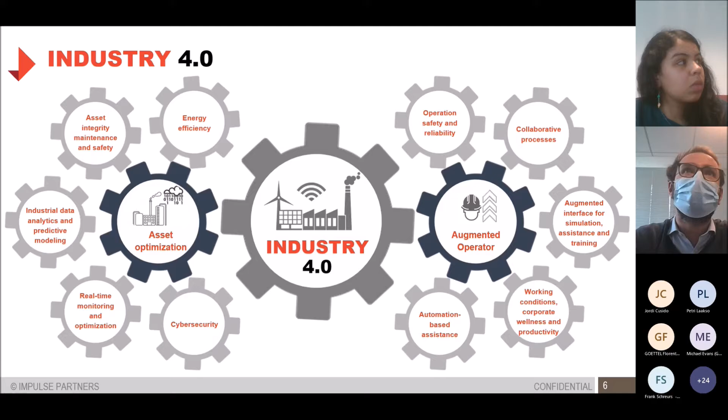Next slide, please. To support this transformation, coming up today we will have the pleasure to hear from Chantal Bottelin from TotalEnergies and the company's initiative regarding low carbon thematics such as the Rainbow Project. Then we will hear use case presentations from 4 entrepreneurs from the UK, Netherlands, Spain, and Finland. We will also hear Jan Borgstädt from Joint Capital, who will present venture activities in Industry 4.0. To close the session, we will have a few minutes at the end dedicated to Q&A. Please do not hesitate to use the chat to type your question. Without further ado, let's start the 13th edition of Impulse Talks dedicated to Industry 4.0.

And Chantal, I leave you the floor to present the Rainbow Project. Thank you, Jérôme. Thank you, good afternoon, everyone. Sorry, I have a huge cold, so maybe it will be difficult to understand what I'm saying. Don't hesitate to interrupt me. So today I'm going to talk to you about the project Rainbow, which is about leveraging digital transformation for decarbonization of our activities and products. Next slide.

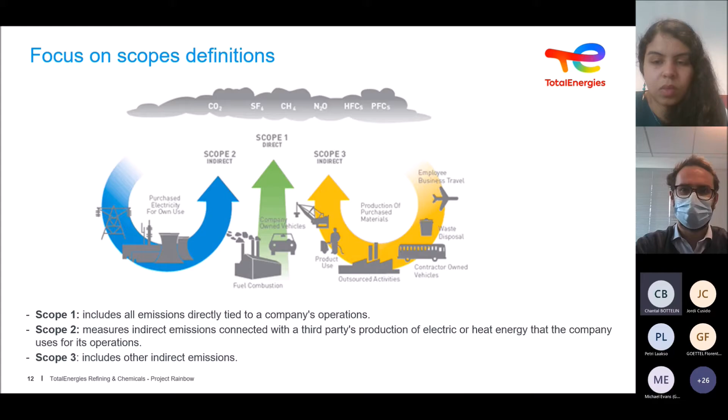So I'll go through the first one, Scope 1 and 2. We have, in general, 280 projects at refining and chemicals related to decarbonization of our activities, Scope 1 and 2. We have carbon capture and storage projects. We have green electricity, and I don't know if you understand what green electricity means, but if you buy some on a private point of view, you probably know what it means for an industry. Energy efficiency, of course, if you consume less energy, you emit less CO2. We electrify our processes, replacing turbines, for example, rotating equipment powered by gas.

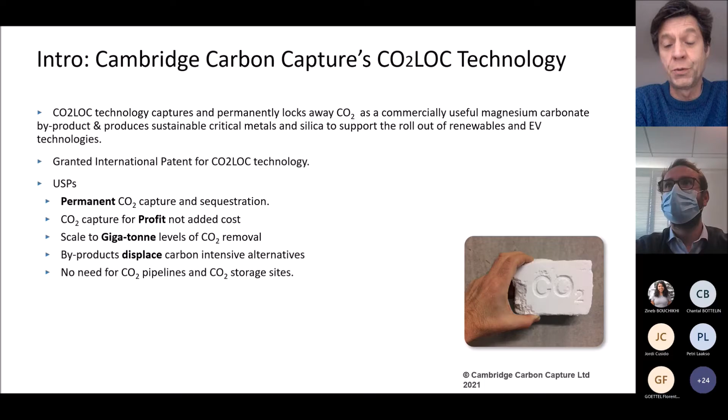Next slide, please. So the opportunity is that in all the IPCC reports that have been published, there is a very large part to play for carbon capture, storage, and utilisation technologies. These are significant quantities of CO2 that are going to need to be captured and stored, and we offer quite a unique proposition. Next slide, please.

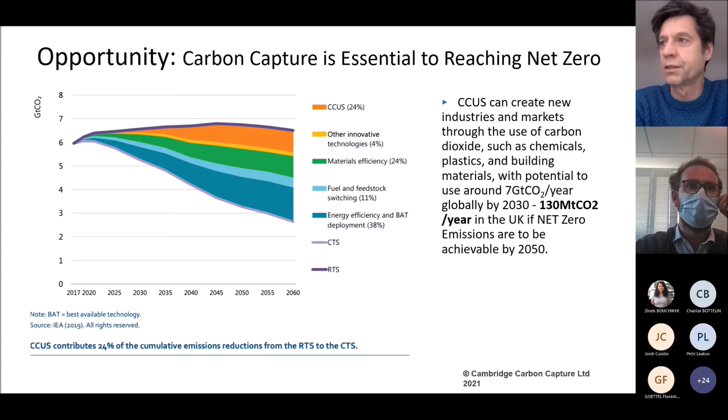So many of the competing technologies to ours involve carbon capture and storage. This is the main industrial solution that's been explored. But this requires very expensive infrastructure. It's very energy intensive to capture CO2, but then also transport it and store it. Then this needs to be monitored over a period of millennia potentially. And there's no commercial benefit from this, so it's all cost.

There are technologies looking to utilise the CO2 that's captured, and some of these do produce other products, and similar to us, these do offset the cost of capture, but not to the extent that ours does. It basically just about covers the cost in the best case. Some of these products are restricted by the size of the markets for the byproducts, particularly in the chemical sector. And some options involving making fuels cannot really be considered a carbon capture technology because the CO2 is re-released through the use of the fuel.

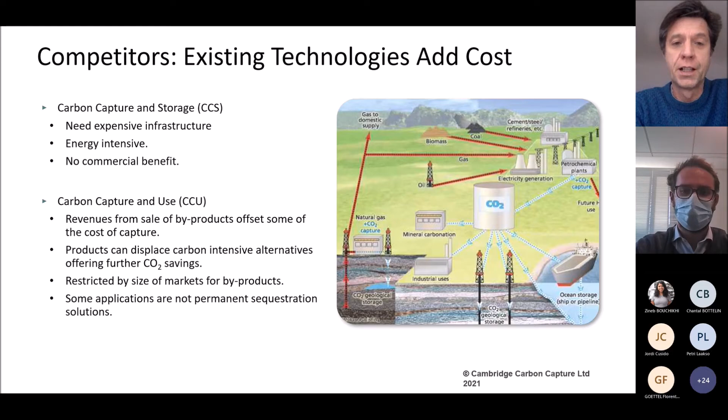Next slide, please. So this is our technology.

It's a two-stage process. I always start with stage 2 because this is where we actually capture the CO2. We can also capture NOx, SOx and H2S as well, incidentally. We do this using a magnesium hydroxide feedstock and standard scrubbing technologies you're probably all familiar with, involving scrubbing using slurries, etc. The CO2 is captured as magnesium carbonate, which can then be dried and used as a construction material, or as base chemicals in various other products.

But for stage 2 to operate on an economic level, we need vast quantities of magnesium hydroxide at a low price. And this is where stage 1 comes in.

Our patented technology enables us to digest magnesium silicates, and some 50 to 80% of the Earth's crust is made from magnesium silicates, so very abundant materials. They're often found in mining tailings, asbestos waste, and various other waste products that we can utilise. Our digestion process splits off the magnesium to form magnesium hydroxide, and we can also recover silica.

But interestingly, we can also remove metals, and some of these are really important metals for the rollout of EVs and renewables generally. Materials like nickel and cobalt are hugely environmentally impactful to process using existing technologies. We offer a potential for making these metals available in a sustainable way.

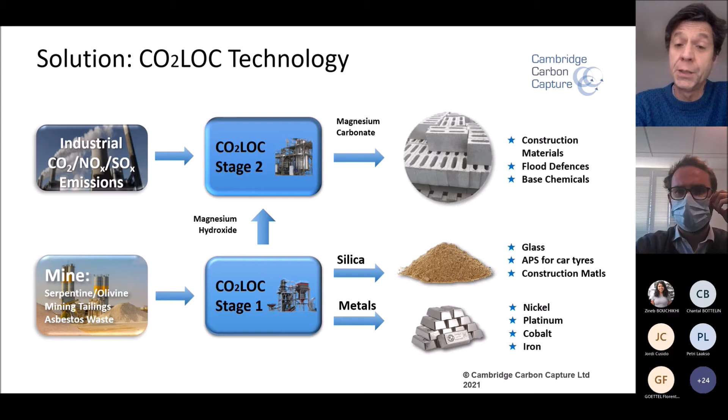Next slide, please. But the most important thing, certainly from a business point of view, is that we can do all this and actually make significant profits per ton of CO2. Using the techno-economic analysis we've done on our process, we're predicting net profits of around £300, that's probably about €350, per ton of CO2 we capture, as opposed to a cost.

And costs are sort of being tracked up to sort of 100 to 600 euros as the predicted carbon price in the future. Next slide, please.

So many use cases. The obvious one is stripping CO2 from industrial emissions. We're also looking at conversion of natural gas to what's now known as blue hydrogen - cracking of methane to form hydrogen and CO2. We can remove the CO2, displacing other quite energy intensive processes like pressure swing adsorption, etc.

We're also looking at cleaning up gases, particularly interested in biogas, because it often contains CO2 and hydrogen sulfide, which is an unpleasant smell you get with biogases. We can strip all those out and permanently sequester them.

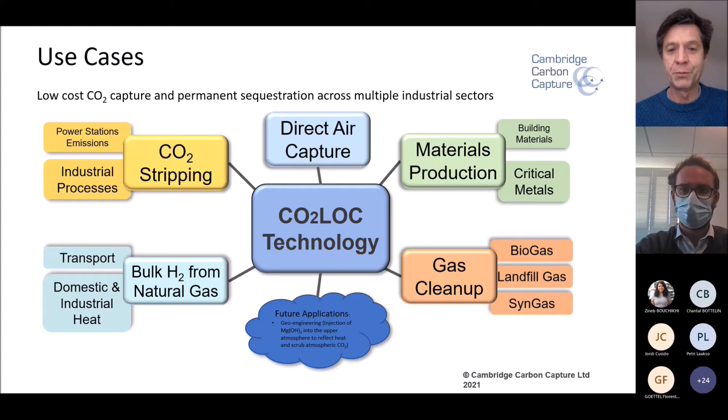Also, interestingly, the production of metals could be a particularly good business for us, particularly nickel, where we can access new minerals that are currently inaccessible because the technology isn't there to extract them economically. Another thing that's quite interesting nowadays is we've now got contracts with the UK government to look at direct air capture using our technology, and this is going to be more and more important as we move forward.

Next slide, please. Yes, so we've got some good traction. We're currently waiting on the results of some applications for grants to enable us to do a pilot plant of our stage 2 process. This will be with a tile manufacturer in the UK.

We're working with Holcim to convert the materials produced from the captured CO2 into construction materials, and we hope to build something from that - that'd be rather special, I think. We have industrial partners to help us with that: scrubbing expertise, and engineering partners to help with the engineering side of the pilots.

We've got another project ongoing involving the UK government, where we're looking at direct air capture. We're currently doing a feasibility study on a 50 kiloton plant based in Merseyside, and it's looking quite hopeful that we're going to get phase 2, which would be a £3 million pilot, again completely paid for by the UK government. Next slide, please.

So, in summary, Cambridge Carbon Capture has a circular economy solution to climate change. This is going to be really important for Industry 4.0, because it's all about resource efficiency and bringing industries together to collaborate to create these circular economies, and we do just that. Our technology is easy to deploy. It's a profitable route to permanent carbon capture. We have the benefit of creating other valuable byproducts, saving further emissions. We've got strong market demand and a rapidly accelerating interest from governments and industry, and we have a strong patent position, offering significant USPs over competing technologies. With that, I thank you.

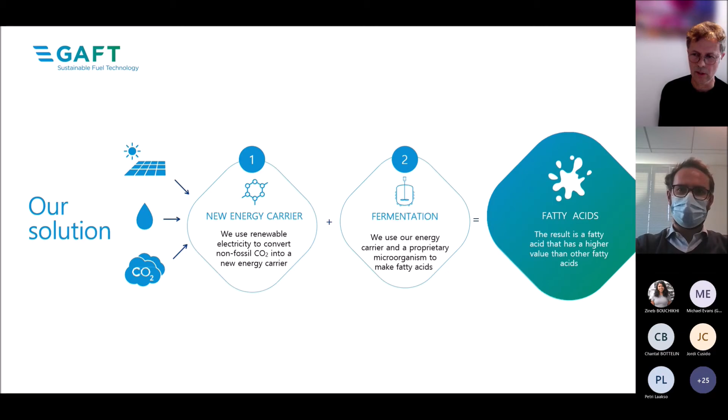Our solution to this has 2 steps. First, we use renewable electricity to directly convert non-fossil CO2 and water into a new energy carrier. Then this energy carrier is fermented to fatty acids. Fermentation is a conventional process, as used in, for example, brewing beer. The innovation is that instead of sugar and yeast, we use our energy carrier and a proprietary microorganism to make our fatty acid product.

Our fatty acid has at least a 20% higher value than used cooking oils for 3 important reasons. First, our feedstocks are abundant and we produce a uniform quality, so no more supply shortages and pre-cleaning of dirty used oils. Second, we don't use any fossil fuels and we don't compete with food, either directly or indirectly. We can produce on site, so no more global sourcing and supply. Third, we recycle our CO2 to new fatty acids, and this together gives us a better CO2 footprint.

On competitors, in a way, we don't compete directly with these less advanced producers of sustainable aviation fuels. We actually help the best current technology that is available to be more sustainable and more competitive in the long term. Total is also converting a few refineries to HVO plants that we hope to supply.

Our team is at the core of the innovation. We have the expertise to convert CO2 to energy carriers, and we really know everything about fermentation processes. Together, we have a truly unique solution. We understand extremely well what our future customer needs, as we have the relevant industry background. We all have a background in the oil market, energy markets, food, and come from disciplines such as R&D, marketing, at corporates, but also as an entrepreneur.

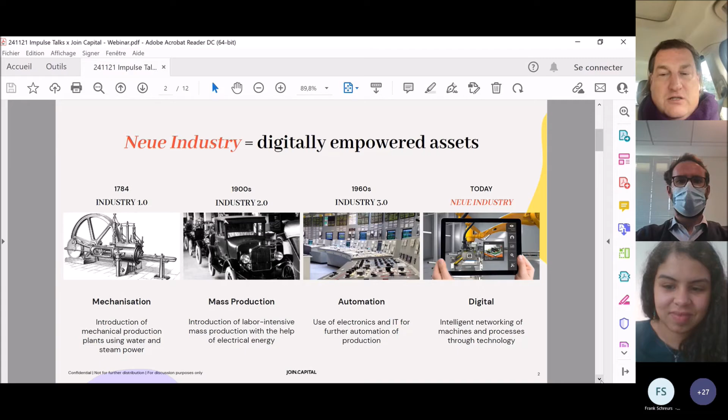On the next slide, these are all the technologies our companies use. To give you perspective, we're an early stage fund - we invest 1 to 4 million euros into startups, and everything I've heard so far is super interesting. We look for software companies that solve these problems. We've already invested in a company that internalizes the cost of emissions and lets you optimize your procurement accordingly - a French company called DataPred. It lets you optimize the timing of when you buy emission certificates. So we're more looking for software solutions, but the two previous pitches really made me feel very good about European entrepreneurs and what we're able to achieve - the future is not lost yet.

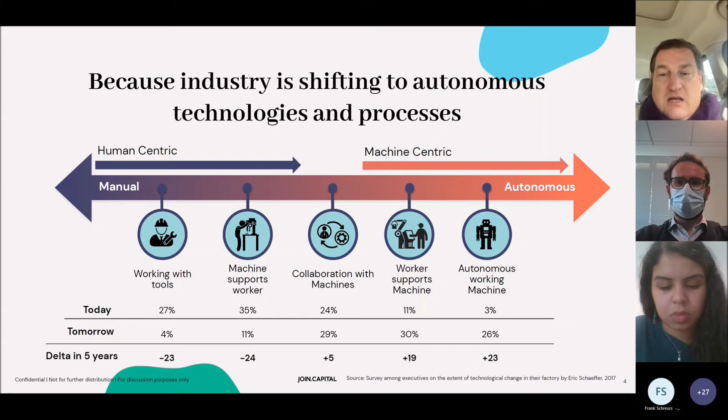What we're seeing in the industry, and also heard from Total, is that the world becomes more and more complex. Everything is real time, and the ESG requirements on top add to complexity. As much as possible, and we just heard it from Total, things will be dealt with autonomously. We're looking for software companies that help large companies achieve this - we only invest in B2B software companies that help larger companies achieve their goals. We've seen three waves of this movement, and if you read this chart from left to right - it's too much to cover in 10 minutes.

Basically what we're seeing is that business models are developing from the customer paying for the unit - now more and more you have pay per use, and in the future you will have pay per outcome, where the provider takes the risk. So if we look at the previous pitches, you would not just pay for the ton of CO2, but also pay for the risk that it's not captured. These other concepts are a bit too detailed at this point.

Let me go to the next slide so I can explain what we're looking for, and what we're offering. As a Berlin and London-based venture investor, we're looking for cool founders building the next wave of software companies, but also for partnerships with companies like Total, who are looking for innovations to reach their goals. Not all innovations necessary to reach these goals will be developed internally, so there's room to work with startups. Early on, already in our due diligence before investing in a company, we expose them to potential customers. We count around 185 companies in our network that we engage with - not all at the same time, but per company we usually do due diligence with 5 to 7 companies.

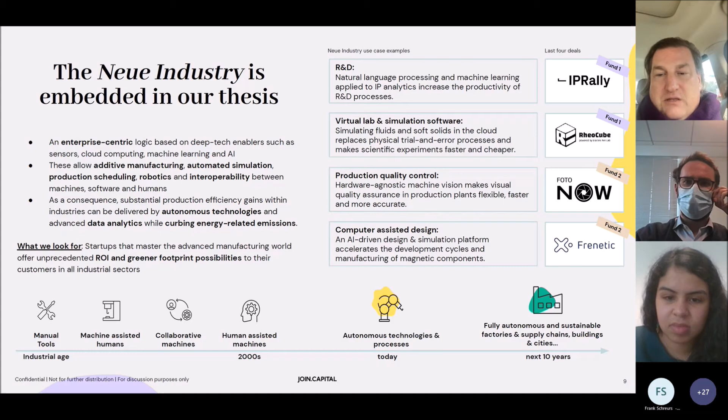FotoNow, I heard today also about quality inspections. FotoNow is a visual inspection tool that lets large companies make sure they have the right quality. And Frenetic is all about electrical engineering, but that's too much detail. Altogether, we have invested in about 20 companies.

If there's a founder here and he needs access to Germany, we're the people that should back you. As said, we're looking for software mostly, but there are always exceptions to the rule, and we're happy to help. We're entrepreneurs ourselves, and even though it might not be the right fit, if you see me on LinkedIn as being a person connected to who you're looking for, I'm happy to help. But basically, this is our offering.

We invest all over Europe, and make sure you find some lighthouse customers in the German industry, which, as we all know, is quite strong. And then in the next step, we help you fundraise further funds to go global.

So my presentation is probably missing. Or is it? Basically that's it. I'm very much looking forward to receiving emails, and again, reach out on LinkedIn if I can do anything for you. Again, we're investors in the new industry.

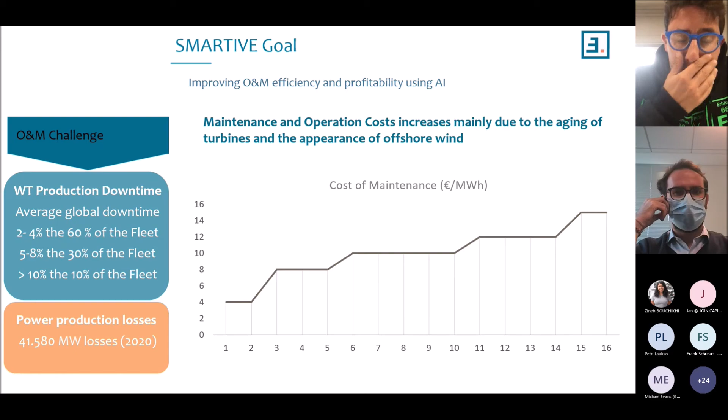Next slide please. A traceable solution that can provide better transparency on the failures, anticipate or diagnose early stage failures, and finally increase the operation efficiency and reduce the cost regarding inspections and downtimes because of unexpected failures. We are using that platform on more than 1,500 turbines worldwide, and what we see is that we can also contribute to the life increase of the turbine.

Next slide. The platform is named SmartCosmos, and it's composed of 3 different modules. Next slide please.

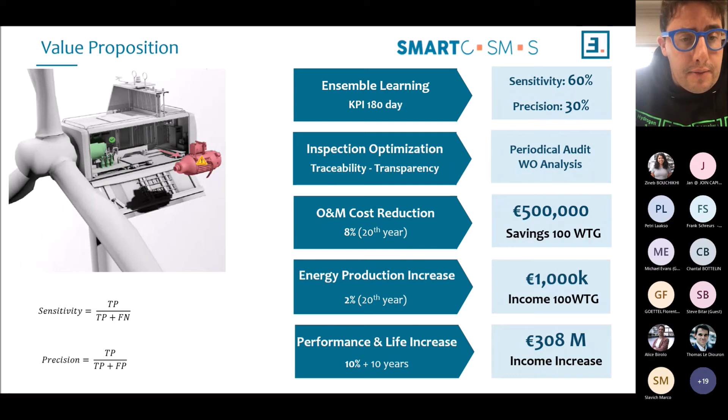The very first is a standard SCADA, which allows fault-tolerant control in terms of regulation of the active power. The second layer is the data analytics solution, in which all the algorithms are introduced, talking about artificial intelligence, IoT collection, text mining for working orders, and many others. The third module is based on performance analytics in order to optimize certain parameters to finally contribute to more efficient turbines.

In terms of data analytics and algorithms, we are on the state of the art. We also published 5 different scientific papers this year, coming from a PhD in collaboration with Fraunhofer. So we have explored supervised, unsupervised analysis, text mining, and many others, from machine learning to deep learning.

What we came up with is a unique solution that can be set up in less than a week. We can set up about 400 turbines in 11 wind farms in less than a week. And what we provide is a unique ensemble learning solution.

What it does is identify the failure in between 3 weeks to 3 months, depending on the component, for detecting that early stage failure.

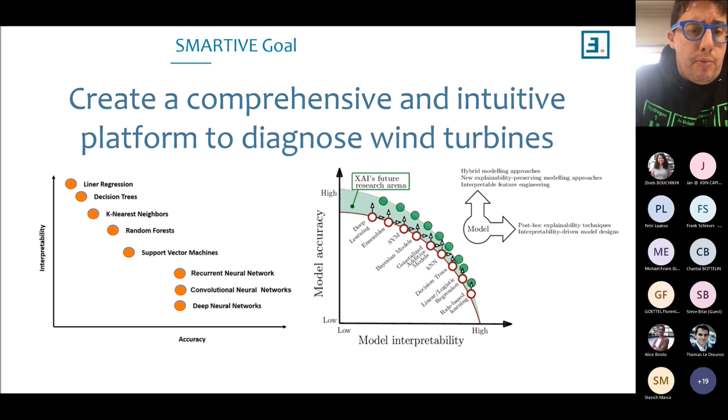artificial intelligence with standard representation of data, like time series comparing a regression model with the actual value of a parameter, scatter plots comparing different turbines, anomalies in a 3D analysis, or even heat maps for the different algorithms. So what we provide is a whole turbine analysis, including drivetrain, PGO, and even tower and blades, without introducing any additional sensor, with a setup of 1 week.

Now it's my pleasure to introduce a business case that we studied last year with 2 of our clients. It was about 687 turbines worldwide from different OEMs located in 11 different countries, 25 wind farms. And what we found out is that we could, considering false positive and fault detection and true detection...

we can contribute savings of up to 861,000 euros, and for the projections for one fleet of 100 wind turbines of 2 megawatts in 20 years, the impact of the platform is 5 million euros.

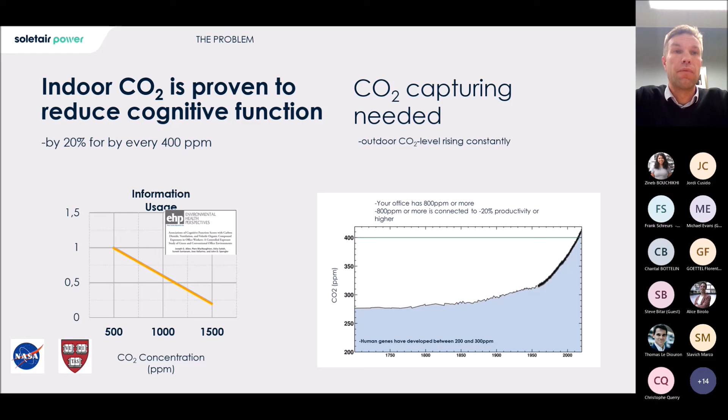The CO2 level in the atmosphere is getting higher, and it's affecting nature, and it's also affecting us people. If we look at scientific data on the left, we can see that indoor CO2 is proven to reduce the cognitive function of people by 20% for every 400 ppm increase in the air. This study is from Harvard in the US. NASA has made similar studies, and many other institutes also. So it means that when indoor CO2 is higher, we people are not as wise as we could be, and we want to change this.

And how we do it in the building ventilation, because the air is already moving, so we should just capture the CO2 away, because in many buildings in the world there is already air moving, and CO2 is just waiting to be captured away. We can do like 50% negative emissions in a building, meaning that we halve the CO2 emissions in a building when you utilize the CO2 in a proper way.

We can sell this as a service for the companies operating in buildings, with the cost of a coffee cup, so $1 to $2 a day per working day per employee. Or we can sell the equipment as an investment for the building owner, for example.

And then we can turn that CO2 into fuels, for example, utilizing electrolyzers and different synthesis processes.

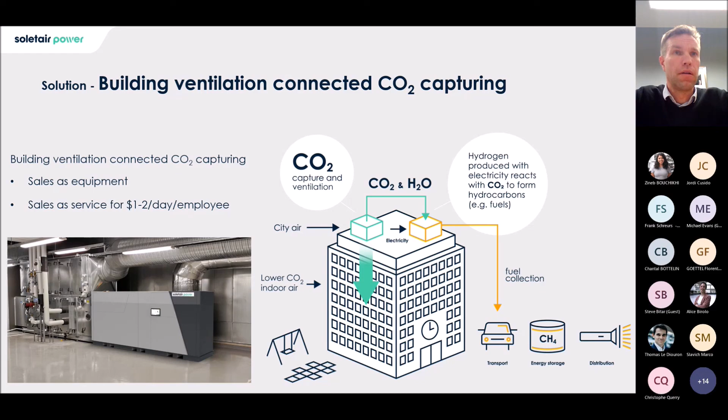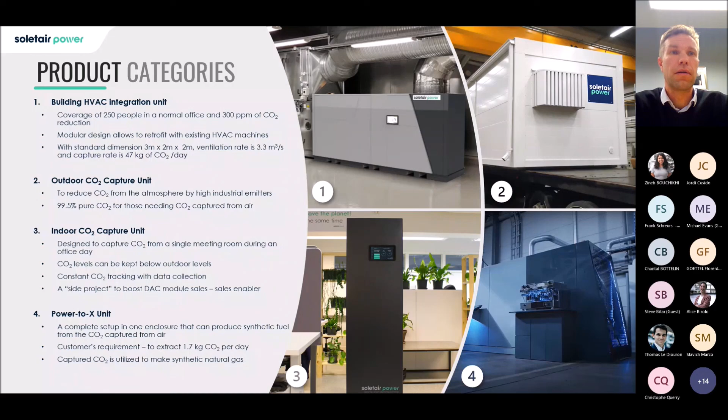So there are other companies also capturing CO2 directly from air, but for example Climeworks, Global Thermostat, and CarbonEngineering are doing it large scale outdoors. We are concentrating on building ventilation to capture CO2, and what we are selling is the best indoor air for companies. And then there's Enverid and Skytree also doing pretty similar things to what we are doing, but Enverid and Skytree cannot capture it in pure form in their normal setup.

Of course, one competitor for us is: please open the window. Well, in high-rise buildings that's not possible, or if there's high temperature outdoors, or really cold, or there's really polluted air in the outdoor environment.

Well, the team is quite experienced. Several different startups were made previously, and we are really committed to solve this problem.

So I'll thank you for your time. My 5 minutes is up, and I'm open for questions.